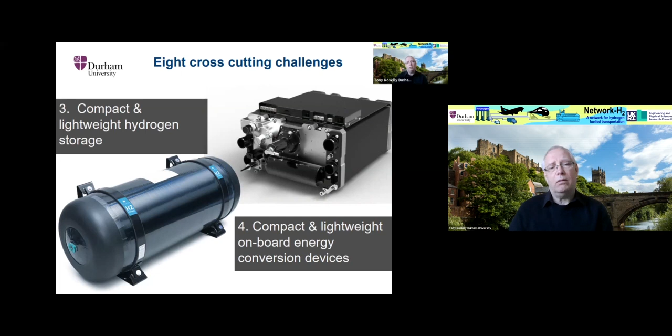The structure of the network is around 8 cross-cutting themes. Firstly, on whole transport and energy systems and the interaction between them, pathways to sustainable hydrogen production and its distribution, compact and lightweight hydrogen storage, and more compact and lightweight onboard hydrogen energy conversion devices. Also on improved lightweighting and efficiency of electrified powertrains for transport applications,

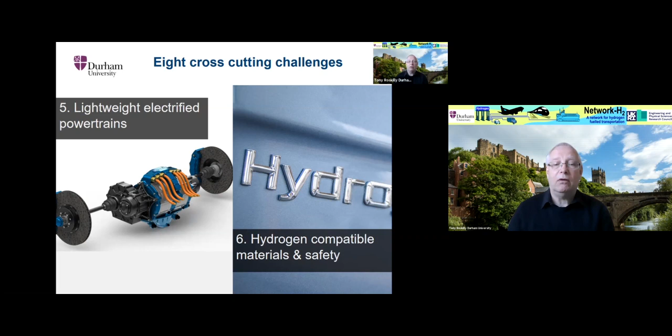hydrogen compatibility of materials and their safety. And the final 2 themes are on multimodal transport, logistics and autonomy, and policy, economics and societal impact.

So EPSRC funds this national network, as I mentioned, and has been awarded to us to allow us to act as a forum to maximize impact from the research that they fund and the research that UKRI fund, and to communicate and share best practice and disseminate information and data all around the theme of hydrogen fuelled transportation, and that's all transport modes.

Also to capture state of the art and identify the research challenges from that exercise and examine ways to incentivize and look at the barriers that exist to the take-up of hydrogen for transport. We also have 50% of our funding to support new research programs, so funding cross-cutting projects to unlock research on hydrogen transport applications.

Also, we aim to provide a wider forum for all stakeholders, again, for all modes of transport and technology developers, and to foster long-term collaborations between outstanding international research teams. And finally, to engage with the wider research community across the physical sciences, social sciences, and engineering disciplines to maximize dissemination and impact of the research outcomes and to stimulate knowledge transfer between academia, industry, government, and other stakeholders.

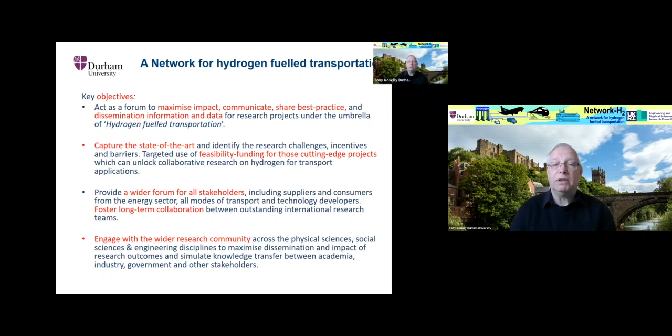So over the 2 days, we are looking at the challenges across different forms of transport, as well as developing the supply chain to support this hydrogen transition. So today is organized in 3 parts. So we're now entering into session 1, which will look at hydrogen production and distribution. We will then host a net zero question time panel with questions provided by the attendees. And then after lunch, we will resume with a session looking at storage and conversion.

We have asked each speaker to present for around 20 minutes. And once they've finished, we will open up for a Q&A session. So without further ado, we'll move into the first session, and I would like to introduce our first speaker.

So Dr. Valerie Dupont is from Leeds University. Valerie is a reader in low carbon energy and a co-I for the Center for Research into Energy Demand Solutions. She has been conducting research into near zero emission combustion and the sustainable production of high purity hydrogen, syngas and methane through advanced reforming processes. So over to you, Valerie.

Thank you, Tony. This is an overview on hydrogen production. So don't expect a lot of details, but more general stuff. So my talk is going to be structured first around world hydrogen production and uses. And then we'll be looking, in a very general way, at the hydrogen production technologies, their pros and cons, what's happening now, what may happen in the future. And then we'll go a little bit deeper into the current reforming technologies and looking at captive and merchant hydrogen. And then we'll do the same with electrolysis technologies, and we'll finish with what we're going to do for net zero in the future.

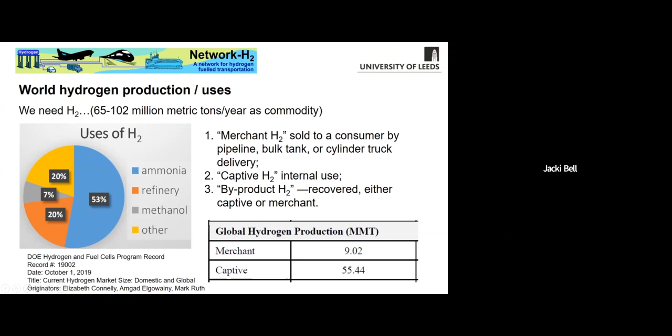My values here are captive 55 million metric tons per annum of hydrogen being produced, compared with a much smaller amount of 9 million metric tons of merchant hydrogen. So again, if we're thinking about expanding the transport chunk, we need this balance of merchant versus captive hydrogen to be really tipped towards merchant.

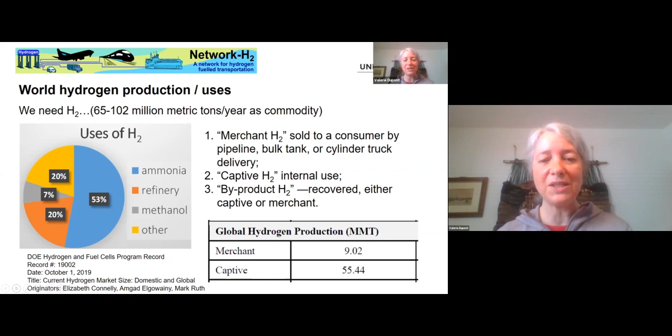So going back to this large chunk of hydrogen use for ammonia fertilizer production, these slides show that the need for ammonia, and therefore hydrogen to produce ammonia, has been growing in tandem with the growth of the world population. So on the left-hand side, the figure shows that since the 1950s, this growth in population has been mirrored by the need for expanding hydrogen production for ammonia production.

And what we have to think about is the future as well, how the continuous growth of population in the world is going to affect this continuous demand increase in hydrogen for ammonia production. So on the right-hand side, what we have is 2019 United Nations projections of population increase, where the middle line is the year 2020. So what we're looking at is what happens after that.

And we can see that Africa is overwhelmingly responsible for doubling the world population over the next 80 years or so. And other regions like Asia, India, for instance, developing countries are going to see their peak reached around 2070 something. So again, we're going to compete with the hydrogen generated for fertilizers to maintain this population growth and food production, as well as the need for transportation in terms of refinery needs, not just hydrogen as a fuel.

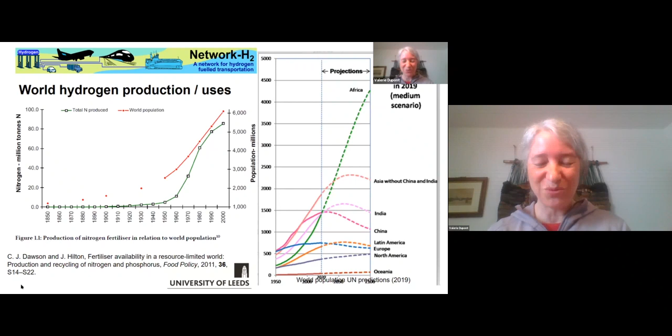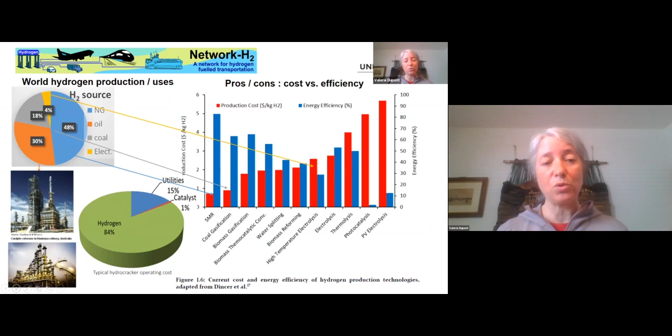They're used for hydrotreatment, meaning that you're reacting hydrogen with a semi-refined petroleum product to remove impurities like sulfur, metals, etc. The main cost of running these hydrocrackers and hydrotreatments comes from the consumption of hydrogen, which is 84%. So this is why we have to top up very often captive hydrogen from refineries with merchant hydrogen.

So looking at technologies a little bit more in definitions, you can produce hydrogen straight from water. We've seen this electrolysis. 4% of our hydrogen is the cleanest, but also the most expensive. And the efficiencies associated with electrolyzers vary according to the type. For alkaline electrolyzers, you'll see efficiencies of hydrogen production between 43 to 67%.

These are electrolyzers that are heavy, and usually they are well used in stationary situations. So you're producing hydrogen in the same place, and then you have to store it, move it to wherever it's being used. So if it's used for transport, it has to be brought to the forecourt.

For PEM, these are proton exchange membrane electrolyzers, also called polymer electrolyte membrane electrolyzers. The efficiency is just slightly lower, but they're very light devices because their electrolyte is made of a polymer. And what is interesting from a transport point of view is that they can be reversible. You can use the same apparatus to generate hydrogen, or you can use the hydrogen and generate power in the PEM fuel cell. So that's why the PEM type of electrolyzers, from the point of view of transport, can be very interesting.

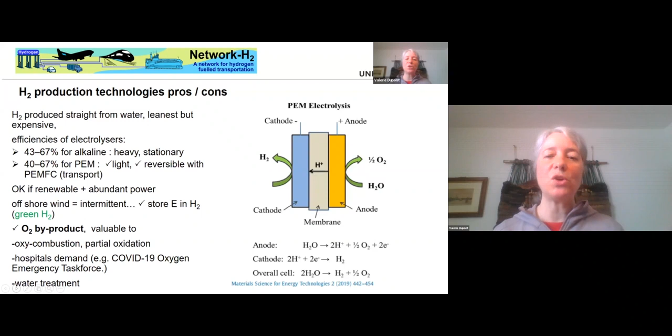And at the cathode, electrons from a power supply are supplied to generate and convert the protons into hydrogen gas.

For reforming processes, those are responsible for most of the hydrogen worldwide. What we're looking at is the conversion of the methane molecule reacting with steam to make four molecules of hydrogen and carbon dioxide. That's the overall process. And it's very heat demanding. Its change in enthalpy of reaction is very positive, so it requires heat, it's expensive to run.

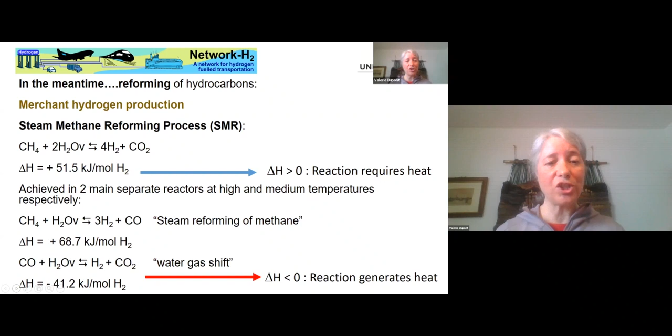This is actually split up into two specific main steps. One is the first step that generates carbon monoxide in the first place, that needs a lot of heat. But the second step, which reacts the carbon monoxide with steam again, is the opposite - it generates heat. So that's why they have to be separated. But overall, you get the production of hydrogen and co-product carbon dioxide.

So there are other reforming processes around that will be important when we start implementing carbon capture at a large scale. These are partial oxidation and autothermal reforming - processes whose main reaction generates heat.

It doesn't generate as much hydrogen as the steam reforming reaction, but the important thing is that because they run on oxygen rather than air or steam as an oxidant, the flues are concentrated in carbon dioxide and water. The water can be condensed easily, and then you can separate the CO2 and store it permanently if possible. The thermal efficiencies of these plants is in excess of 70%, which is larger than electrolysis.

If we look at the heat demand of just splitting water per mole of hydrogen, the splitting water reaction requires 4 times more than the steam methane reforming process. So that's why you have this dominance of the steam reforming process.

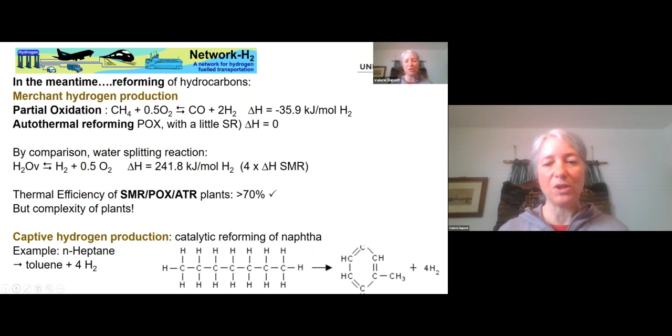In the bottom part of the slide, you can see the captive hydrogen production. There's an example of how hydrogen gets generated through the catalytic reforming of naphtha. So this example is an N-heptane conversion to toluene plus 4 hydrogens. This type of reaction happens a lot within the refinery, and the hydrogen is then reused for the hydrodesulfurization, hydrodemetallization.

So the problem with reforming technologies is that they have complex plants. They're complex plants that have been perfected, optimized over many, many years. So that's why the efficiency overall of the plant is large. But you have to take into account that every single stage has a reason to be.

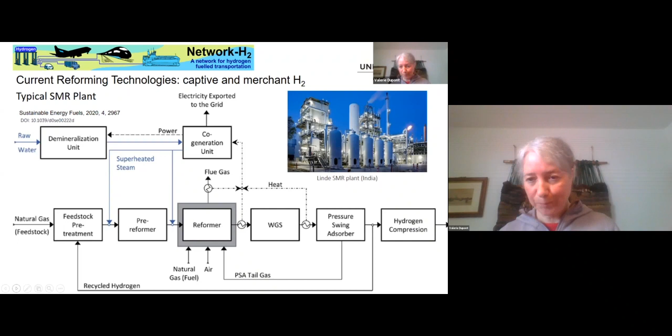This is done via a multi-bed adsorption process that changes the pressure back and forth to enable the hydrogen to flow through and the impurities to be diverted. These impurities will contain a significant amount of the product hydrogen itself, as well as unconverted methane. So all this is flammable, and that's why it's recycled to the furnace. And then finally, you have an expensive stage, which is the hydrogen compression.

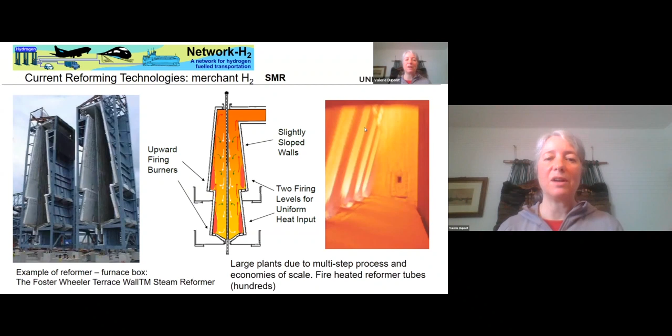These are examples of the furnaces that are holding the reformers. And as you can see, these are very stringent conditions, very high temperatures, whereby tubes that contain the catalysts are in the center of the furnace. These are very long tubes, typically 14 meters long, just over 10 centimeters diameter. They're filled with ceramic coated catalysts or impregnated catalysts that are usually made with nickel and alumina.

And the problem with these large plants is that if you have a power outage, the very, very expensive tubes can break. And that means either condemning the tubes or replacing them. They're extremely expensive, and their material is made to resist very high temperatures normally.

Another issue with SMR is the amount of carbon dioxide that's emitted. So for 100 million standard cubic feet of production of hydrogen, the typical emission of CO2 associated would be around 9 kilos of CO2 per kilo of hydrogen.

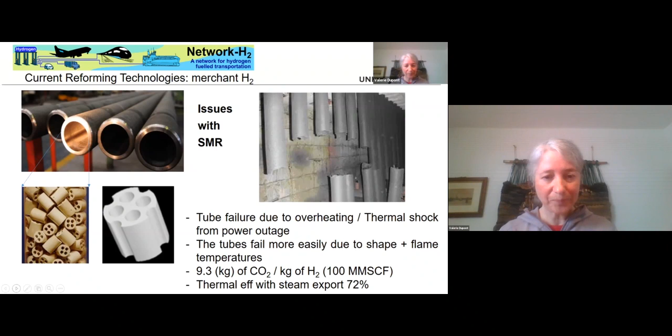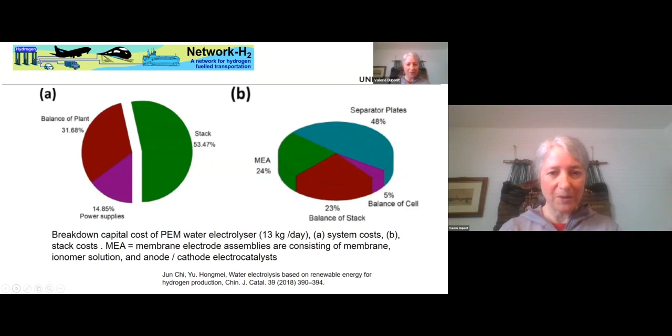In the future, what we envisage is that for green hydrogen generation, ideally you want this to be done without CO2 emissions, so from a renewable source, and a large renewable source, so that we can benefit from economies of scale. Therefore, for us in the UK, where we have abundant offshore wind, you have to think about offshore wind coupled with electrolysis platforms offshore, which would run with a water purification unit using the water supply from the sea. The generation of hydrogen and oxygen would then be kept momentarily underground.

The duration of this underground storage and the frequency of the periodic offloading will affect the cost later on of the whole plant, CapEx and OpEx. So when we look at studies that have considered such setups, the net present value for 2 days storage would become positive at around the 8th year for a 35-ton production.

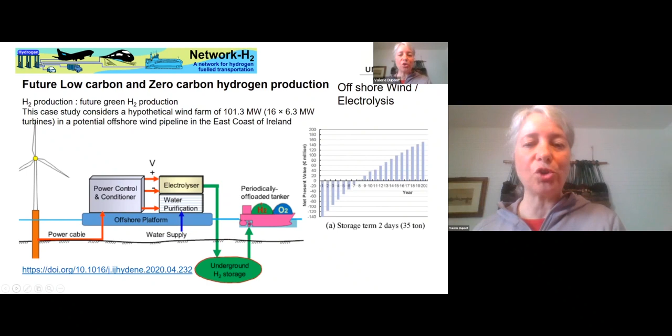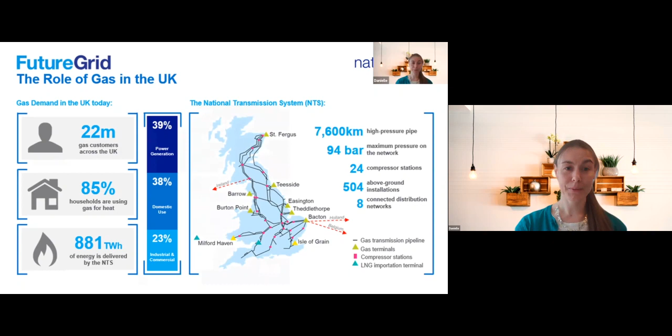I just wanted to set the context, and I'm sure many of you are familiar with it. Since the announcement in June 2019 that the UK is committed to a legally binding target of net zero greenhouse gas emissions by 2050, and of course 2045 in Scotland, we've really started to see an increased focus both from government, industry and academia on the energy transition. We had a whole host of policy announcements in this space just before Christmas.

So we had the Prime Minister's 10-point plan, we had the Energy White Paper, Scotland's Climate Action Plan update, Treasury's interim net zero report, and of course the Climate Change Committee's recommendation to government for the 6th carbon budget, which we've just seen this week has been enshrined in UK law. Over the coming months, we're expecting the hydrogen strategy and a heat and building strategy in the lead up to COP26, which is the global international conference on climate change.

But I just want to draw attention to the Prime Minister's 10-point plan and some of the policy aims for hydrogen in there. So within that plan, there's an ambition to have at least 5 gigawatts of hydrogen production capacity by 2030 in partnership with both industry and wider industry. So in a high hydrogen scenario, government estimates that it could see the UK benefit from around 8,000 jobs by 2030 and up to 100,000 jobs by 2050. So to support this, they've proposed a range of measures, including a £240 million net zero hydrogen fund. And we'll soon see business models to support more private investment in this space too.

By 2023, and this is of particular interest to the gas networks, they're aiming to have testing completed to allow up to a 20% blend of hydrogen with natural gas into the gas distribution grid. And they also want to see a large hydrogen village trial by 2025 and a hydrogen town by 2030. So all of this shows that the government is really serious about hydrogen. And in all credible analysis to reach net zero, there will need to be some level of hydrogen in the economy. Different analysis talks about different amounts, but there is always some level.

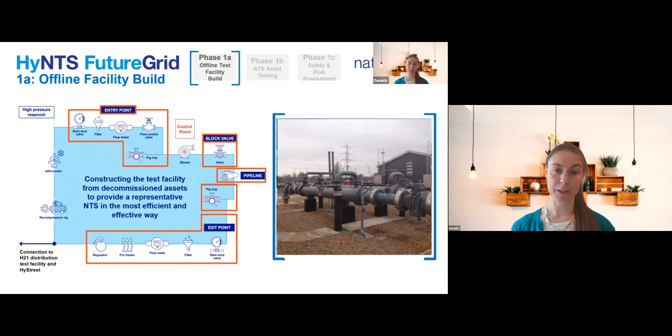So just to give you an idea of some of the assets, I won't spend much time on this, but we have an entry point, we have a block valve, a pipeline and an exit point, all as part of phase 1 of this trial. And the exit point allows us to either recirculate gas around the test network or redirect it to NGN's distribution facility. And as I mentioned before, these assets are coming from all over our network, so really are truly representative of the assets.

Now, I mentioned phase 1. That's everything I've been talking about so far, but there are a couple more phases that come after this. We're also looking at deblending and compression. So that's part of phase 2. So for anybody who noticed, compression wasn't part of phase 1 in the next couple of years. But from 2022, we'll be starting to set up all of the assets to be able to test compression and deblending that I mentioned earlier.

Finally, in phase 3, we'll have third-party testing. So we'll open up that facility for anybody who wants to test some of their assets, further collaboration, and potentially also using it as a training facility. And alongside this, we're also considering where we might be able to do online trials with real consumers.